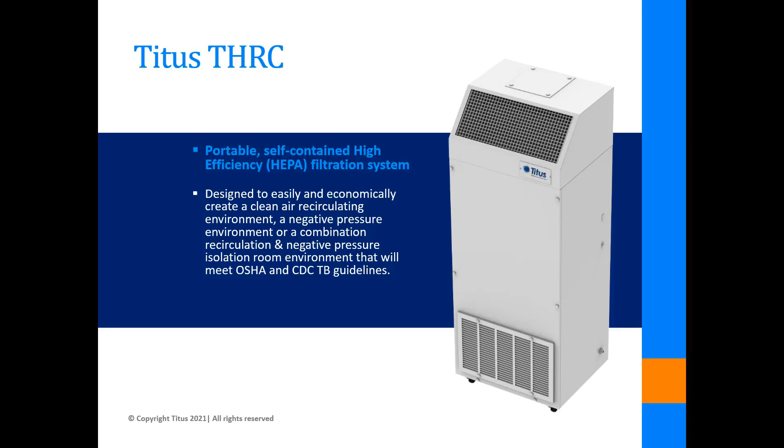THRC units contain a HEPA filter rated at 99.99% efficiency in removing 0.3 micron particles. The units also contain a MERV 8 pre-filter, which lessens the particulate loading on the HEPA filter and thus extends its useful life. An air pressure sensor within the unit illuminates a pilot light to indicate when the HEPA filter needs to be changed.

THRC units are significantly quieter than those of our competition and require little maintenance other than filter changeouts. The THRC high flow unit, shown here, incorporates a 3-speed switch to deliver up to 800 CFM through its HEPA filter.

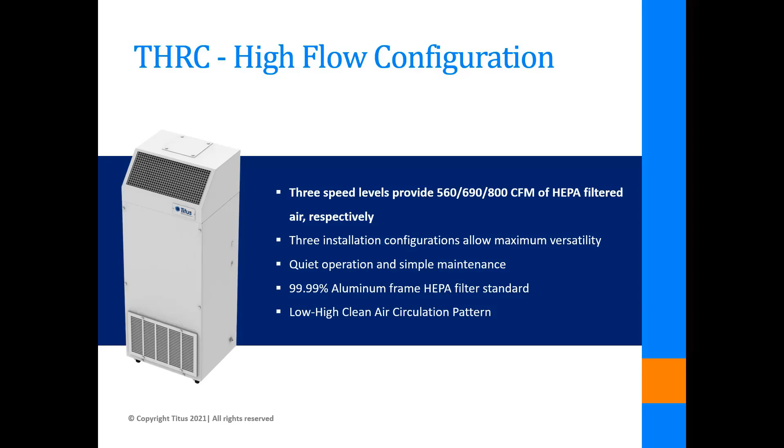The THRC low flow unit is pictured here. Its motor speed can be manually adjusted to deliver anywhere from 70 to 400 CFM. Again, that airflow is either recirculated back into the room or exhausted from it. The low flow unit incorporates all of the other features mentioned on the high flow unit.

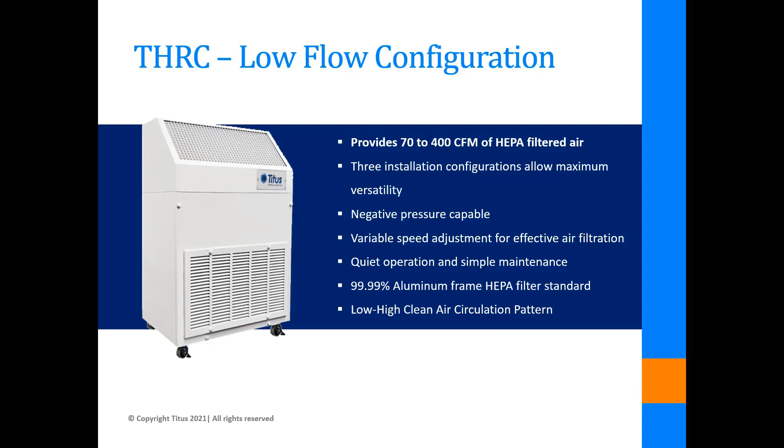THRC units are designed to operate in 3 distinct configurations: full recirculation, full exhaust, or partial exhaust. THRC units operating in their full recirculation mode serve as air scrubbers and significantly reduce pathogen concentrations in the spaces they serve, reducing the risk of airborne disease spread to both staff and visitors.

Room air is drawn through a return inlet in the lower part of the unit's face. Cleansed air is then returned to the room through an egg crate type grill located within the slope top face of the unit.

Units operating in full exhaust mode clean the air within the space prior to removing it. There is no recirculation of the cleansed air back into the room. Instead, it is exhausted through a wall, window, or into the room's exhaust duct. Operation in this mode requires replacing the grill in the top panel of the unit with a plate that contains a nominal 8-inch diameter duct connection collar. This plate is sold separately.

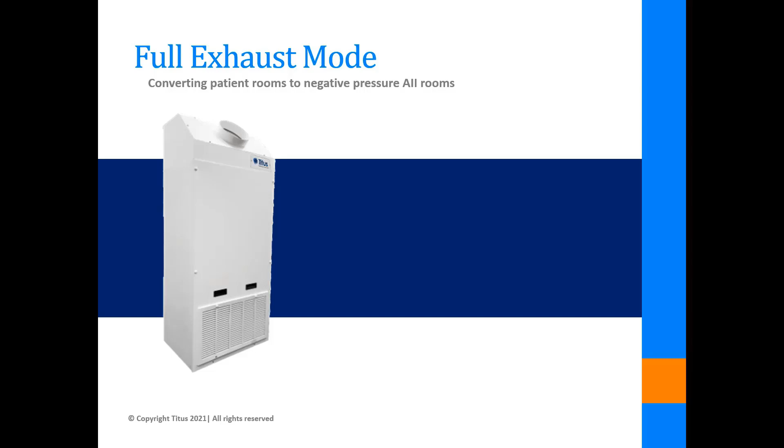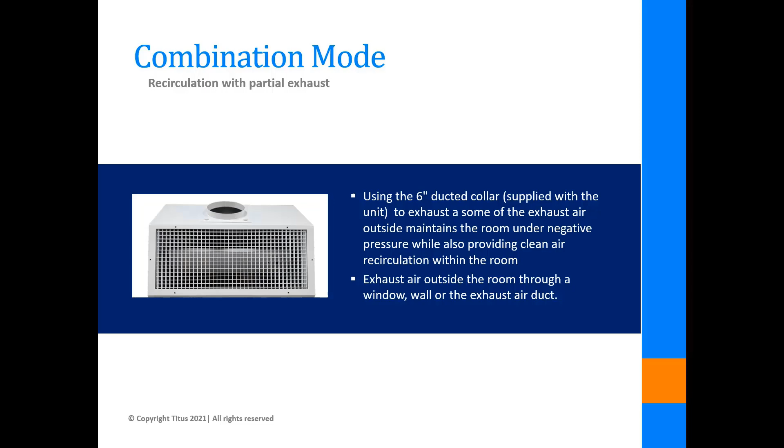THRC units operating in a partial exhaust mode recirculate half of the cleansed air back into the space while exhausting the other half. A 6-inch duct collar furnished with the unit replaces a blank-off panel on top of the unit to allow a flexible duct connection to the room exhaust system. Partial exhaust, where allowed, reduces the energy waste involved with direct exhaust to the outdoors while reintroducing cleansed air back into the space.

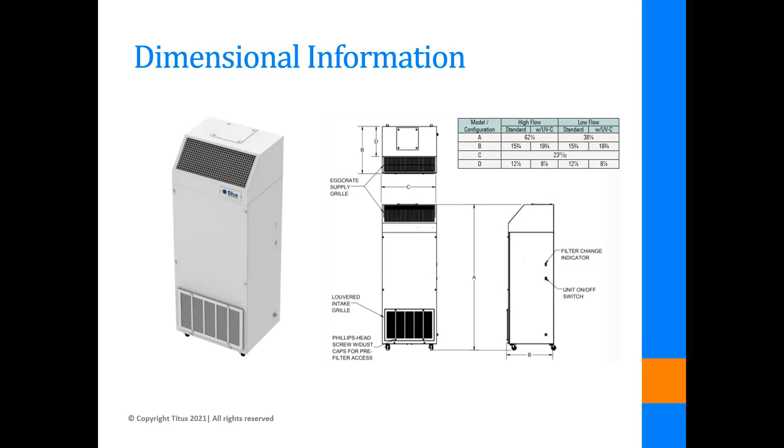This slide details the dimensional information for the two models. Note that the depth of the units is only 15 3/4 inches, and they can be located right against a wall since both the intake and discharge is accomplished through the face of the unit. Also note that they can be furnished with an optional UVGI light. We will discuss that in more detail later in the presentation.

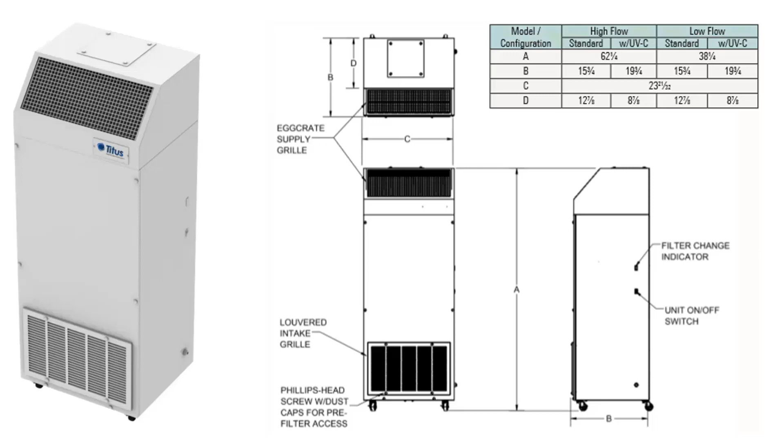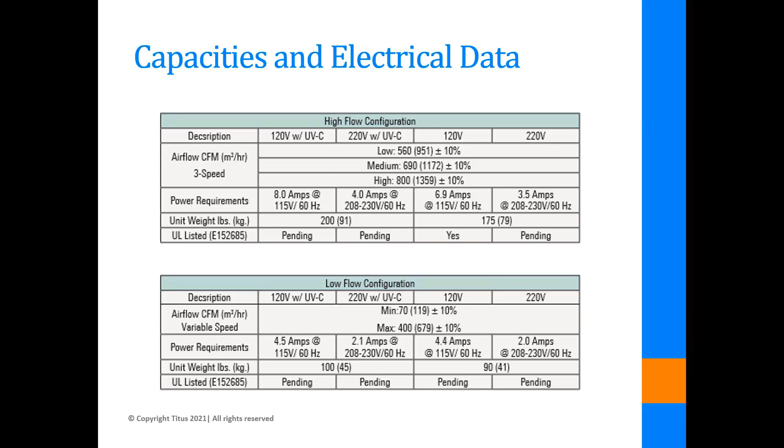Other options that are available include upgrade to an ULPA filter with an increased efficiency of 99.999%, upgrade to a carbon pre-filter, and a discharge panel replacement that incorporates an 8-inch diameter collar for connecting to flexible duct when the units are applied for full exhaust.

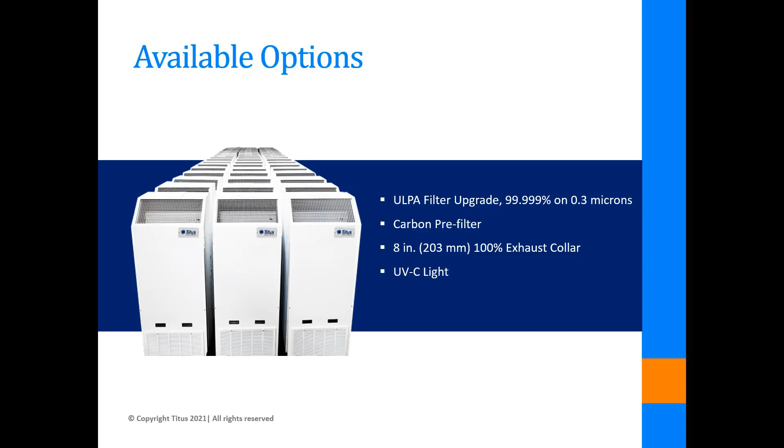The UVGI light is an attractive option that has been well thought out. It is located upstream of the HEPA filter, which allows it to kill viral particles that have been trapped on the inlet surface of the filter. Although HEPA filter changeouts and handling should still be performed in a safely prescribed manner, doing so is less likely to result in disease transmission to service personnel.

The HEPA filter also shields the motor and its wiring from exposure to UVC rays that can damage plastic and rubber components. As you can see, the front panel of the unit is removable for servicing the filters and the UVGI bulb.

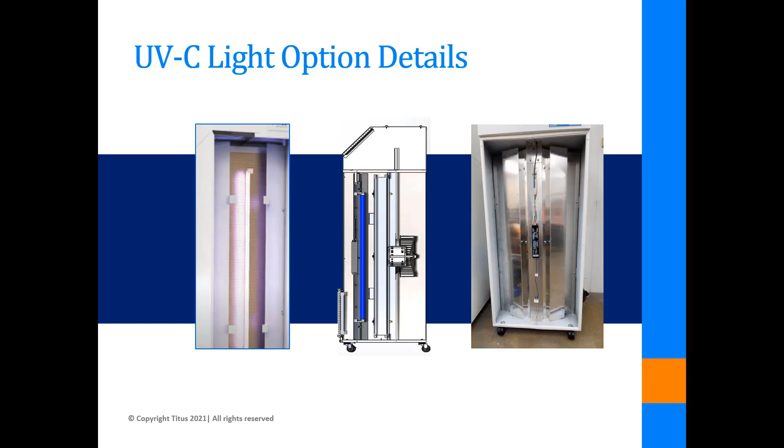Let's look at how HEPA and ULPA filters work. Particles passing through the filter can be captured in three basic ways. Large particles are strained upon encounter with the filter. Smaller particles that pass through the face are captured by impact with other fibers. Or very small particles diffuse randomly through the filter media, which increases their likelihood of impacting on a fiber and being captured.

While HEPA filters are rated for their ability to capture 0.3 micron particles, they're even more effective at capturing larger or smaller ones. Although the nuclei associated with COVID-19 are typically only about 1/10 of a micron in diameter, they are efficiently captured by the diffusion process.

Although ASHRAE Standard 170, ventilation of healthcare facilities, does not require that general patient rooms be maintained at a negative pressure with respect to their surrounding spaces, doing so is a good idea during pandemic times like we are facing with COVID-19.

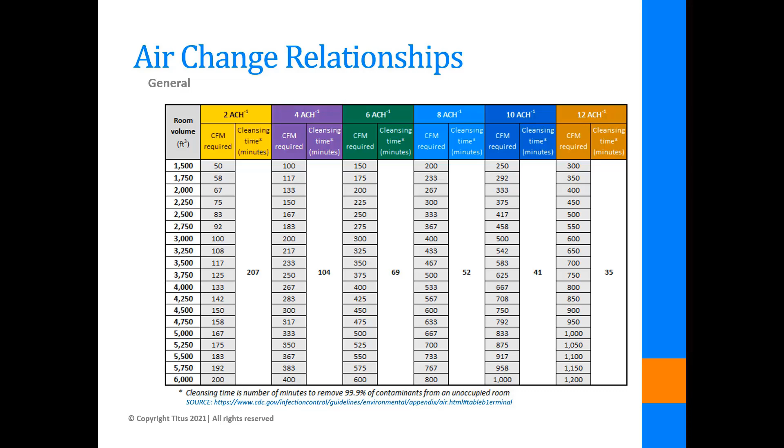Now let's talk a little about the applications these products are intended to serve. The units are specifically designed for use in healthcare facilities. This includes both inpatient and outpatient facilities. As the units are portable, we will limit our discussion to adding them to existing spaces in order to upgrade their configuration or enhance the removal of viral aerosols.

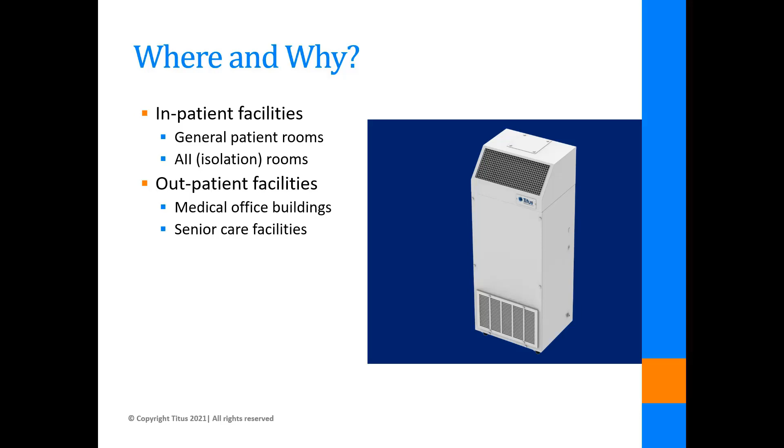The ventilation and filtration requirements for various spaces in healthcare facilities are currently governed by ASHRAE Standard 170, 2017. For a standard hospital patient room, a minimum of 4 total air changes must be delivered to the space, although it should be noted that facilities designed before 2013 required a minimum of 6 air changes.

These air changes can be either ducted or contributed by recirculation of air within the individual space. At least 2 of those air changes must be ducted outside air. All of the air supplied to the space must be passed through a MERV 14 filter before entering the space.

When operating in this mode, recirculation through the THRC HEPA filter removes 99.99% of pathogens before returning the cleansed air to the space. The unit would ideally be placed directly across the room from the patient's bed and would deliver clean air back over the patient.

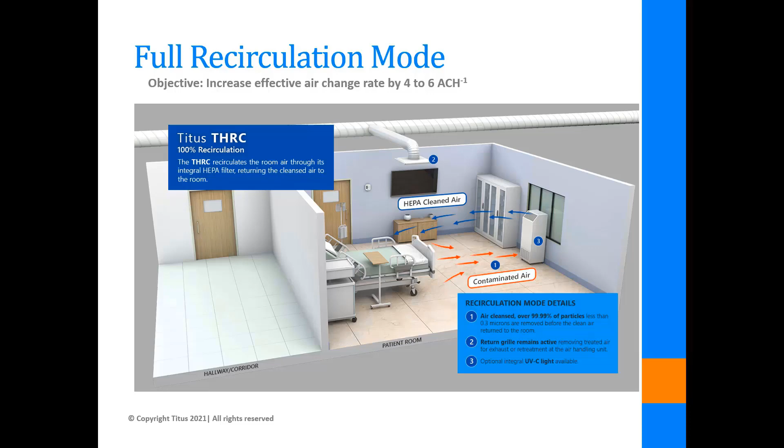This would also result in significantly reduced pathogen contamination levels in the air exhausted from the room, reducing the possibility that these pathogens could be recirculated to other spaces served by the air handling unit.

This table relates the capacities of the THRC units for providing various air change rates to varying room sizes. It is likely that a patient room's volume would be between 2,000 and 3,500 cubic feet. Note that only the areas of the table which are typically relevant to this application have been identified.

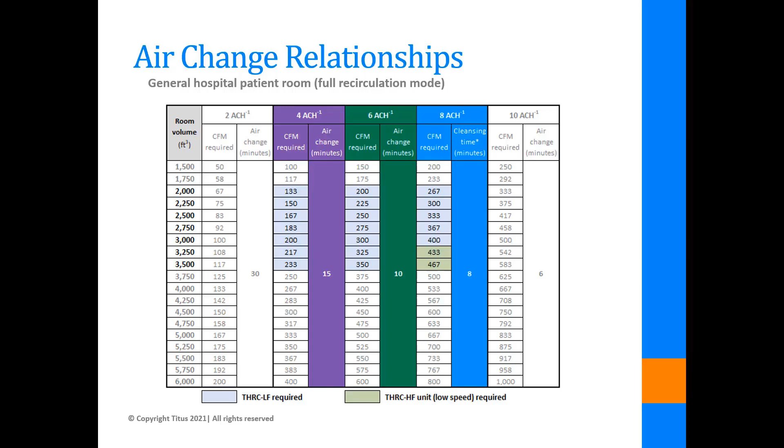In the full recirculation mode, the units could provide 4 to 8 air changes of cleansed recirculated air in addition to the 4 to 6 total air changes provided by the ventilation system.

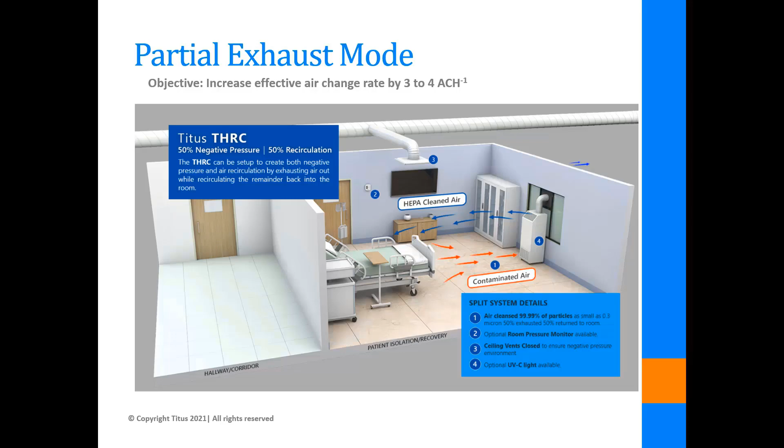THRC units also serve general patient rooms in a partial exhaust mode. In this case, half of the unit's airflow is recirculated back into the room while the other half is exhausted. This exhaust portion could be ducted outside, into a corridor, or through the room's return grill. This would also result in a slightly negative pressure within the room, which would in turn reduce the likelihood of pathogens escaping to surrounding spaces.

During pandemic periods, THRC units could be used to temporarily convert standard patient rooms to airborne isolation rooms. These rooms require that a minimum of 12 air changes per hour of exhaust be maintained at all times. As with general patient rooms, Standard 170 prescribes that a minimum of 2 outside air changes passed through a MERV 14 filter within the air handling unit be delivered to that room. The total airflow delivery must be maintained sufficiently lower than the exhaust airflow rate to maintain a negative pressure differential of at least 0.01 inches of water between the room and its surrounding spaces.

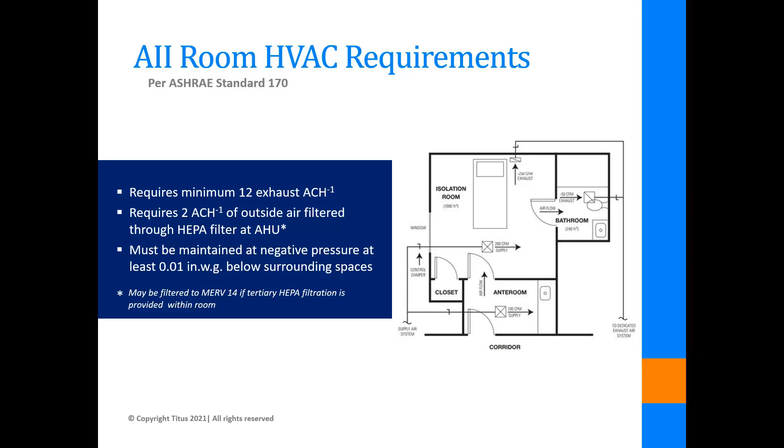As previously mentioned, general patient rooms are designed for supply and exhaust airflow rates that typically range from 4 to 6 air changes per hour. THRC units can be used to exhaust the additional 6 to 8 air changes required by an AII room. The exhaust is passed through a HEPA filter and can be directed outside as shown or ducted to a surrounding space once it's been cleansed by the room air purifier.

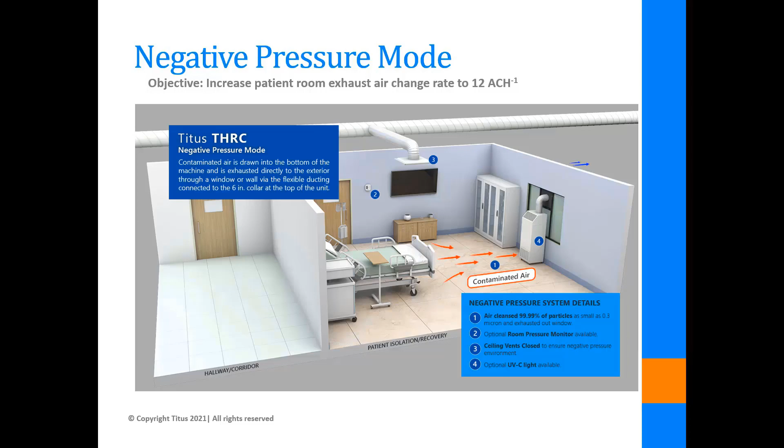The hardest hit population during the COVID-19 pandemic has been the senior citizens in nursing homes and other long-term care facilities. Most of these facilities employ PTAC units that simply recirculate reconditioned room air. Ventilation air is delivered by a separate dedicated outdoor air system to the corridors and larger gathering areas, but not directly into the resident living spaces.

Standard 170 prescribes 2 outside air changes for resident living areas and 4 air changes for gathering areas. It does not regulate the amount of room air circulation, which in this case is intermittent and based on the room's conditioning needs. In addition, the DOAS air handling units serving these spaces need only employ MERV 8 filters and will rarely be able to adapt to a filter that is capable of removing small particles like viruses.

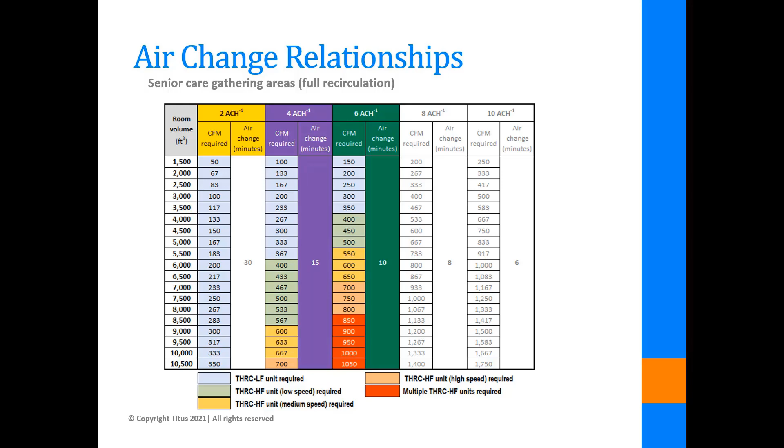Of course, gathering areas are often larger than living areas, so this table is expanded to include larger room volumes, which would include areas such as dining and socializing areas. THRC high-flow units could be used to recirculate 4 air changes per hour of clean air to spaces as large as 10,000 cubic feet, increasing the room's effective air change rate to 6 air changes per hour. Larger spaces and higher recirculation rates could be treated by multiple units.

In addition to the spaces we've identified, THRC units could also be used to mitigate disease transmission in other healthcare spaces such as emergency rooms and waiting areas, intensive care units, sputum induction procedure rooms, and dialysis centers.